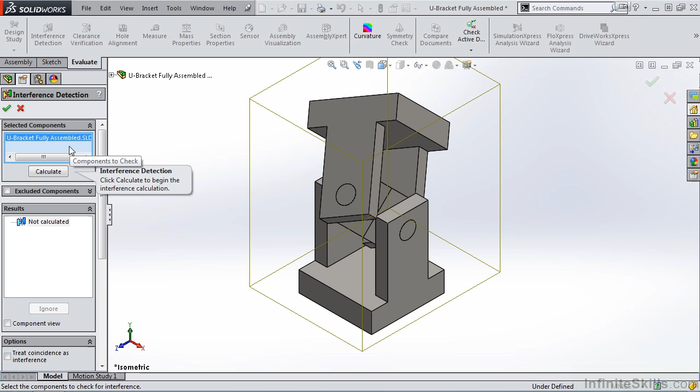Before we get into interference detection, if you would like to work along with me, go into your working files folder and open the assembly named U-bracket fully assembled. Now let's begin. I'll select the interference detection icon and the property manager opens. In the first window, this is where you specify what components you want to check. By default, SolidWorks inserts the entire assembly.

In most cases, you want to clear this window and only select the components that you really want to check the interference between. This will greatly reduce the resources required by SolidWorks to calculate the interference. Once you select the components, and I select the 2 U brackets, you then select Calculate.

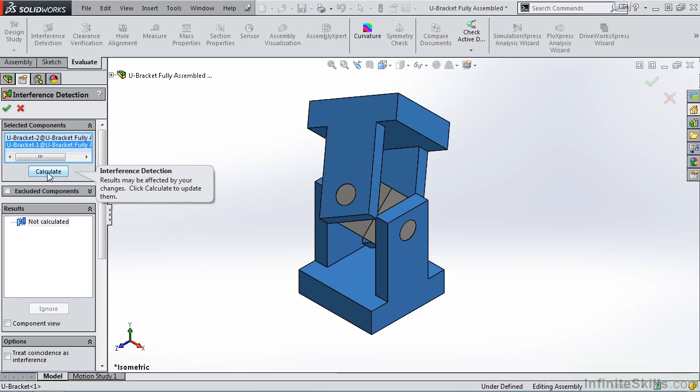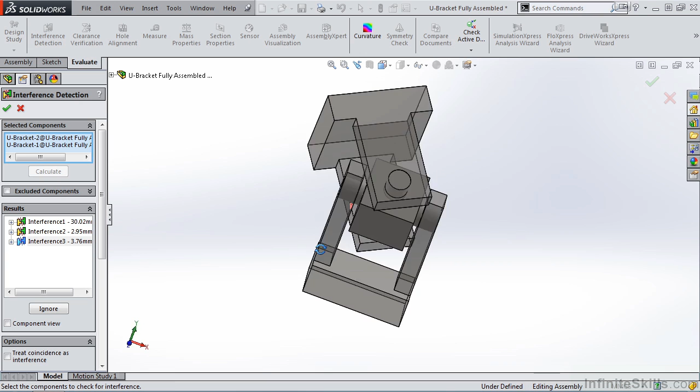Notice in the results window, I have 3 interferences. Interference 1 is located in this area, noted by the red color. Interference 2 is in this upper corner, and interference 3 is on the back side of the assembly. Also note the interfering parts are shown transparent, and that is because if we scroll down the property manager, you will see there's a check mark in front of Make Interfering Parts Transparent.

Let's scroll back up. Any one of these interferences can be ignored by simply right mouse clicking and selecting Ignore. Now once you ignore it, notice it's grayed out, but it's still showing up in the results window. And that is because we have the Show Ignored Interferences checked. If we uncheck it, it's removed from the window. If we check it, we see it once again in the window. At any time you want to unignore the interference, you simply right mouse click and select Unignore.

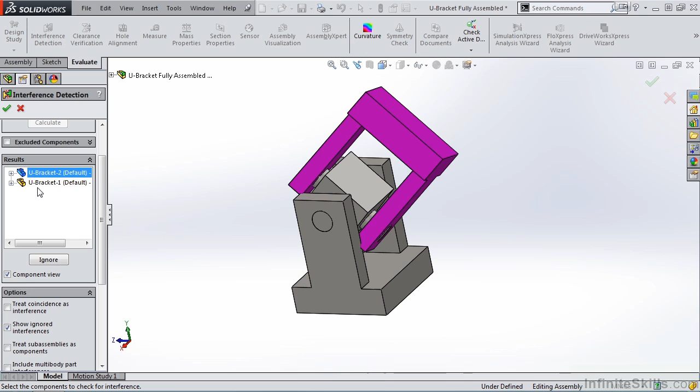Right below the results window, we have a checkbox for component view. If I select component view, and let me collapse the tree, notice the window only displays components, U bracket 2 and U bracket 1. I'll uncheck it.

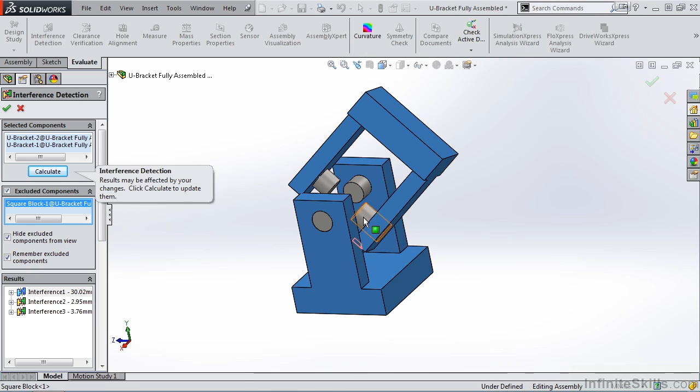Moving a little bit up, notice we have a checkbox for excluded components. Now if I put a check mark here, in this example, I am going to use it to clean up my assembly. I'm going to go out to the screen and select the square block and the 4 pins. By doing this, it makes it easier to see the interferences on the screen. So once again, interference 1, interference 2, and interference 3.

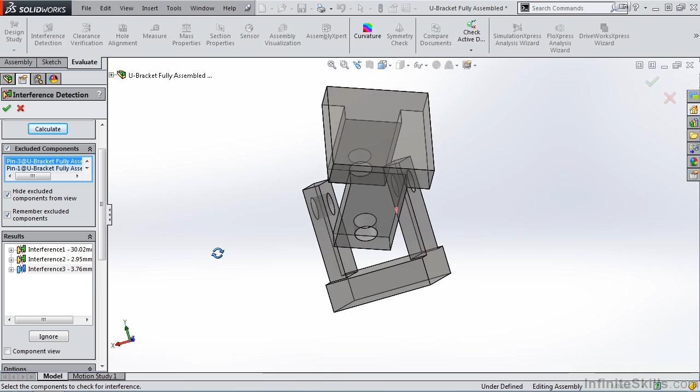So that gives you an idea of how interference detection works, and hopefully when you build your assemblies, this would be a tool that you will use to see if any of your components are interfering with one another.